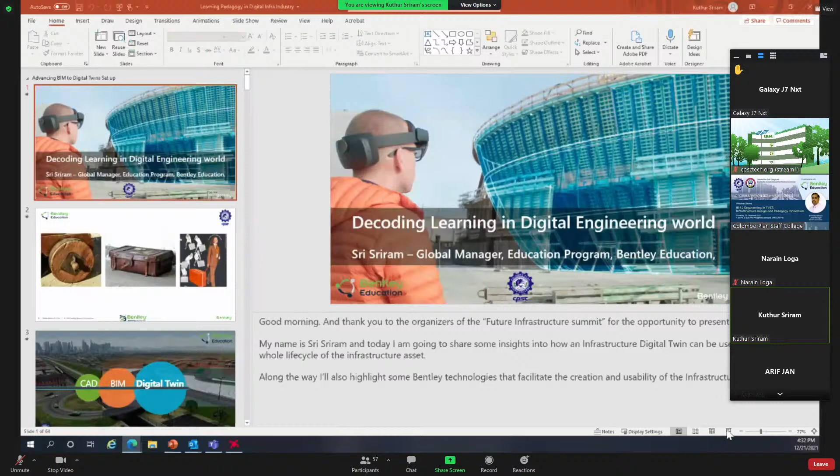Can you all see my screen? Narain? Yes Sri, we can see it clearly. Good, beautiful. Sorry, my camera doesn't seem to be switching on. I don't know, I had more than half a dozen meetings today and the camera was working fine all the time. Now I think my computer doesn't seem to be a good friend of Zoom after all. Anyway, thank you all for your time again.

I can see about 58 people on the line there, appreciate that, and it looks like all across Asia again. So is the presentation in presentation mode, Narain? Yes Sri, not yet, it's not in presentation mode. Okay, now it is. Good, beautiful. Thank you, and the audio is good — very good.

Appreciate that. Okay, I think I'll jump straight into the topic. Thanks to CPSC for giving us this opportunity. This is about decoding learning in the digital engineering world — specifically about career opportunities in the digital infrastructure world. And if we're talking about career opportunities, we're talking about students, so we also need to talk about what teaching opportunities and learning opportunities are available. So this is all about that topic. Let me jump straight into it.

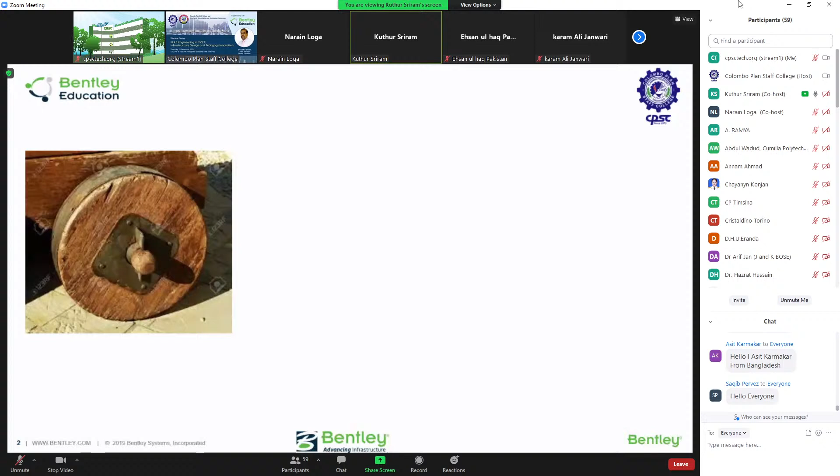The leather suitcase was invented around 1910 to 1917. But the real productivity improvement happened when somebody innovated by putting a wheel onto the leather suitcase, and it became a stroller — an automatic stroller. This brought in real ease, and now I think nobody travels without a stroller today.

So why am I talking about this story now? Because I'm talking about the digitalization of the infrastructure industry. So I'm going to take you through a small story now. There is something called CAD, then BIM, and a digital twin. If you are from the infrastructure industry, you will very much understand what I'm talking about.

Before CAD, possibly in the early 1940s, 1950s, and 1960s, people used to do their designs on a sheet of paper. You remember these large drawing boards, and people had vector scales to work with. So to build a road like this, they had to do at least about 200 to 300 drawings.

Then came the computer-aided designing tool, which tremendously helped everybody by bringing everything onto a computer. So what was the advantage? Papers were gone, multiple drawings could be done in one place, and multiple people could work on the same design. For example, if you're building a house, a bricklayer could be working on the same design, while your air conditioning man and electrical man could also be working on it. So computer-aided designing also brought in mobility, and easier access and storage.

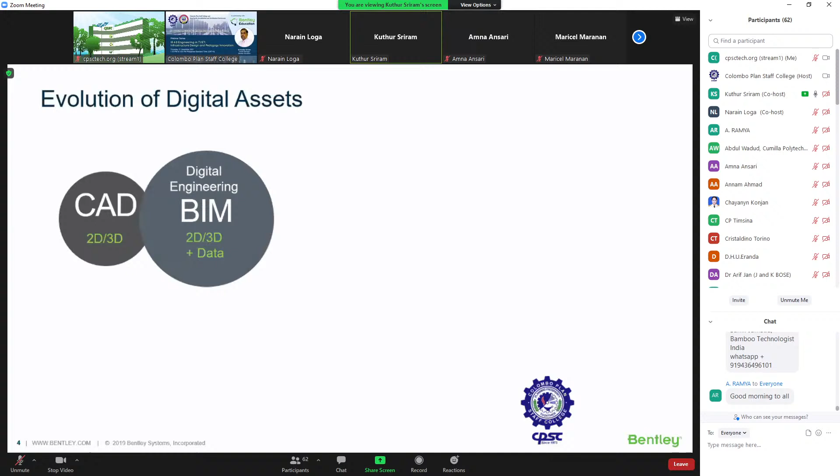So that's where the digital twin came across. What I'm talking about with digital twin is: CAD gave you a 2D, 3D design document. From there, BIM came across, which is called digital engineering - it gave you the 2D, 3D plus the data that was needed. But the biggest revolution was the digital twin. Digital twin very strongly not only gave you the design 2D, 3D, it also gave you live data, so I could do my design using a lot of insight into that.

Imagine if I have live data, if I'm building a road, and I have live recording data about the traffic progress that goes on, I can even simulate 5 years down the line when the traffic increases - how will the road design do, how would it look like? So my design I could do with live data, with a lot of insight, looking forward in time. That's the revolution the digital twin had.

So what is the relevance of this in the industry today? Most organizations today are digitally driven organizations or projects. If you look at the top 10 construction organizations, contractors, or top 10 government organizations which own these projects, they're all completely digitally driven organizations or projects. So if we do not have students who are digitally trained, who understand the digital process in the infrastructure industry, if we don't have a training pedagogy and methodology which are digitally driven, we are losing out in the market.

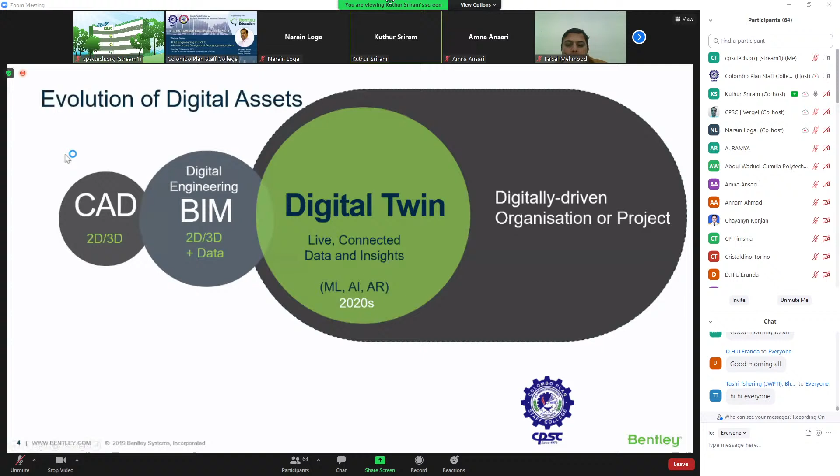The analysis of why it's the lowest is based on two things. One, the infrastructure industry is not completely digitally driven yet. Second, the infrastructure industry also has multiple stages of life cycle. If you look at a car, they build it and then possibly retire it when a new model comes in within 8 or 9 years - so the life of a car is only about 9 or 10 years. But the road you took to come to your office, the road you take to the market, the bridges you cross, the airport you travel from, possibly started even before we were born, and it will go even beyond our time. So the life cycle of the infrastructure industry is too large, and if you are not digitally driven, if you don't have digital data, you lose out. That's why the per capita productivity goes down.

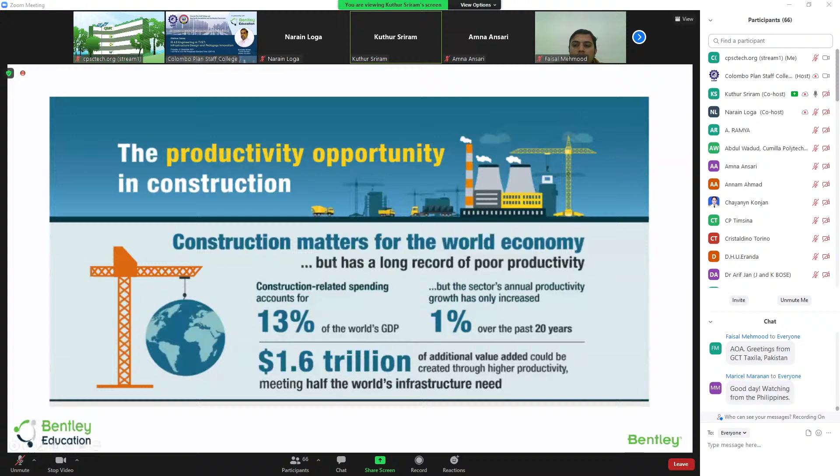Is it not a compelling story why the infrastructure industry should be digitalized and should use digital twins? But I won't stop there. I'll go into the next story as well. Why are the other industries so productive? Why are they so prosperous? I will show you how digital twin is used in other industries.

The reason I'm talking about digital twin and digitalization here is that somewhere down the line in my presentation, I am going to tie it up with digitalization-related learning opportunities and teaching opportunities. What is the learning pedagogy? I'm not going to dive deeper into what could be the learning method, whether it's lecture based, or hands-on based, project based, and what could be the curriculum, because I'd need half a day for that. But this is only a teaser, an introduction to show you, in the digital world, what could be the pedagogy opportunity that could come across. An organization like Bentley can work in partnership with CPSC and your organization to find out how to make this learning easier by creating curriculum, providing tools, and creating project experience.

So that's the idea. Right now I'm on a story about why digital twin is important, how digital twin has made a big difference in other industries, and how digital twin can be taught across. So now, digital twin in other industries - why are they productive? You saw the manufacturing industry; they are one of the top performers in productivity.

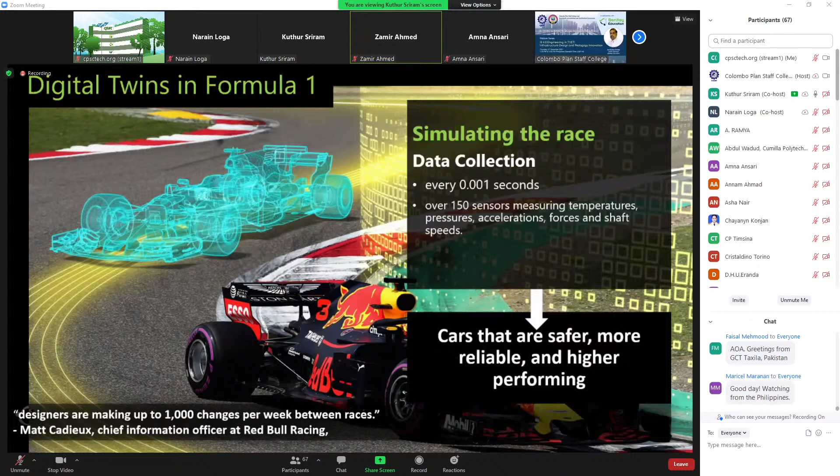This is one industry. I'll go into the next one - this is NASA, the spacecraft.

So that's another industry which extensively uses digital twin. Now going from aerospace to aircraft industry - are you aware that Boeing and Airbus, even before they bend the first sheet metal, create a digital model that shows how the engine works, how the acceleration works, how the heating works on every part. Not only is the designing good, they can also use the digital model to train the pilots and the mechanics who repair the aircraft.

So what is the crux of the story? Every industry is extensively using digital models, digital twins. So let me come to what digital twin is being used for in the construction industry, which is what I'm talking about here. A digital twin could be used very strongly in construction to monitor energy consumption.

Imagine there's a huge airport or stadium, and you want to know which part needs more air conditioning because more people are sitting there, or which part needs more power. A digital model can help you optimize energy consumption, because if some part of the airport or stadium is lesser occupied with people, you can automatically switch off the power there.

Then in the rail industry, imagine the rail tracks run for kilometers. If you want to monitor track wear and tear, you don't have to physically run through the whole track - a digital model can help you. I'll show you a video, a presentation that talks about how it can be done, so wait for my presentation down the line.

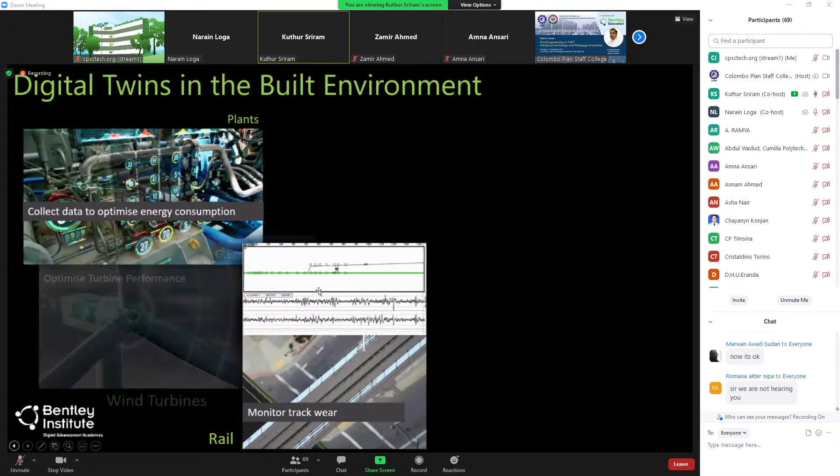And then in the wind turbine industry, you can use a digital model to extensively design a wind turbine. And then for roads, particularly in highly populated Asian places, when you design the road, you can simulate the whole traffic that goes across.

Again, wait for a video - I'll show you a presentation of how traffic simulation could be done, where I would clearly know at 9 o'clock in the morning peak hour what the traffic is, at 12 o'clock what the traffic is. So when I do a design, if the traffic is this much in 2022 or 2021, five years down the line, assuming population growth at a particular percentage, what will the traffic be? Can the road design take it? I don't have to build the road first - I can actually simulate with the available data to design my road accordingly. So in roads, a digital twin really helps you.

And then in any urban city or small town, you need utilities planning for power and water. You can digitally design the underground water pipes and power cables in a digital model, so that you know digitally where the pipelines are and where the electrical power supply is before you dig the earth. So these are certain ways digital twins are used, and in all these places, if you're talking about a road design as a curriculum, you could bring in a tremendous amount of learning pedagogy.

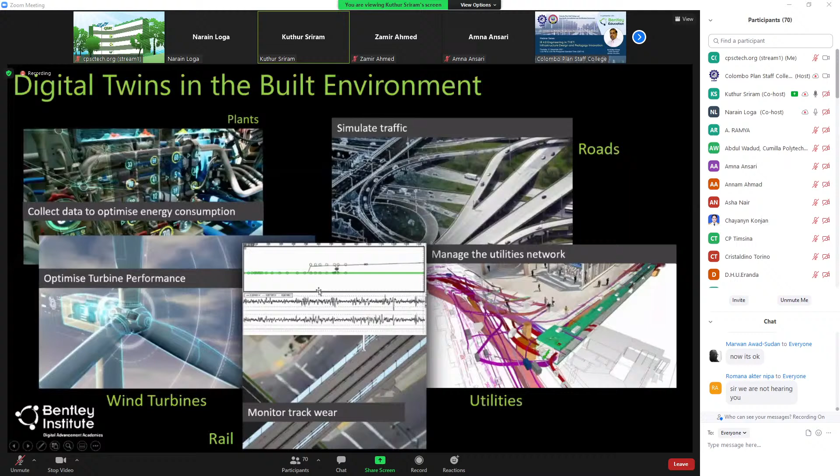So I talk so much about digitalization, let me explain what is the digital twin. Digital twin is nothing but a continuous digital representation of a physical asset. A simple way to explain that is, if you have a mobile phone and you take a picture of yourself and look at the picture, that's a digital twin of you. You are the physical one because you are living in blood and skin, but the digital picture available is a digital twin of yours, because it could be sent across as proof of identity. You don't have to go there. So that's exactly what a digital twin is.

But the only difference between that photo and an actual digital twin is that a digital twin is a continuous representation. If you take a picture now, 5 years later, that picture is not a digital twin of yours, because in 5 years you would have had changes in your hairstyle, changes in your skin color, changes in whatever. So 5 years has an effect on every human body. A digital twin is a digital representation of a physical asset, but it's a continuous one.

So that means data has to be really connected. If I relate it to a building, say you have a digital model of your house, and data keeps coming in every year. If your outer wall color is fading, and the picture exactly captures that color fading of the outer wall, you exactly know what your digital model is showing about the house. You can make a decision about when to paint it, what to do. So that's exactly what the digital twin is all about.

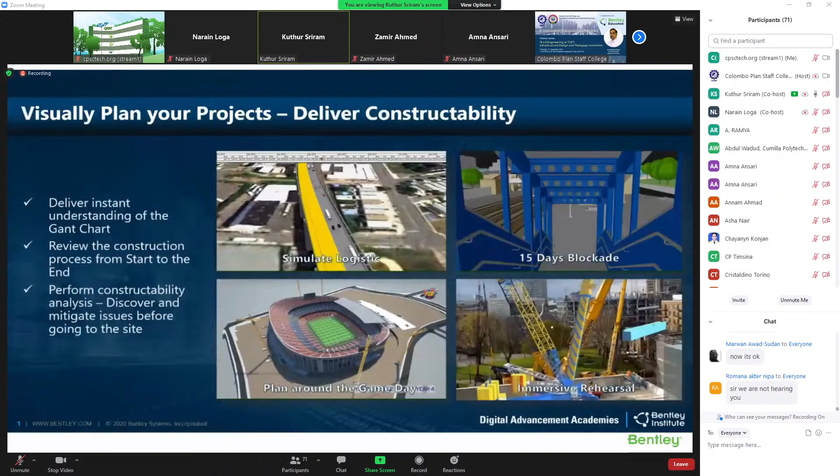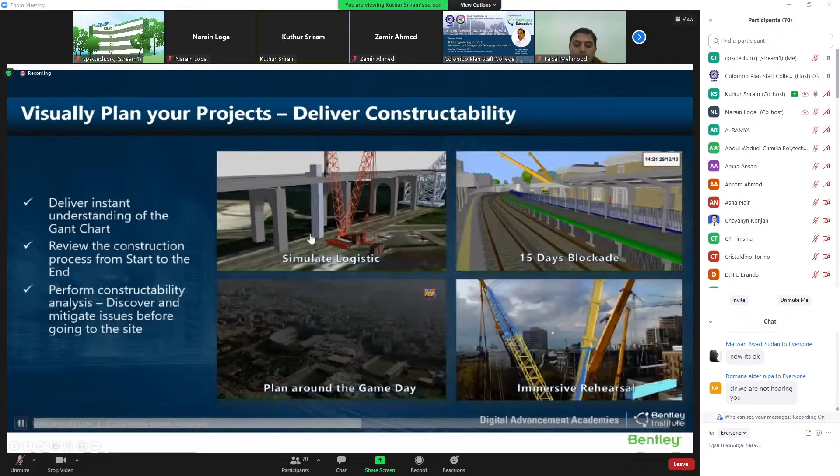See, imagine this. I will also connect it to the pedagogy here. This is simulating the logistics of a bridge being built across. If your student can actually use a digital model to find out when do I need a crane, when do I need a crane operator, and when do I need a truck driver to bring those components. Plus, when the crane is operating, what are the areas I have to cover up for safety? And then as a training manager, you could show the set of engineers how it is. So this could be a part of learning as a pedagogy, right?

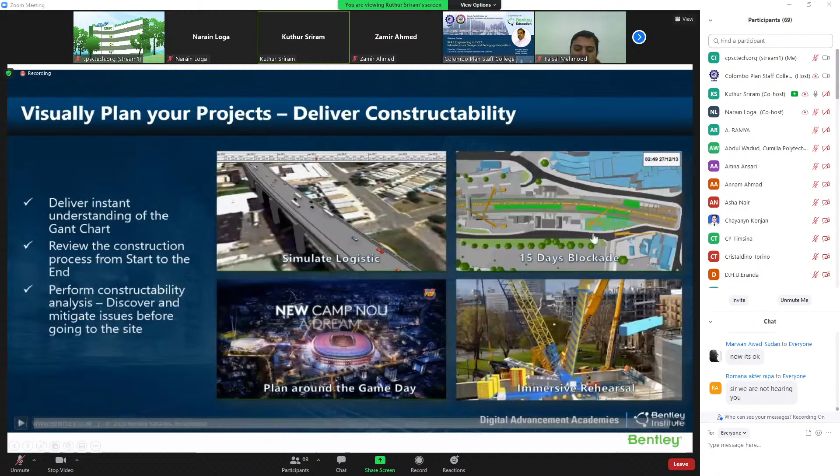And this is a planning example. Suppose a construction planning engineer or supervisor can actually use a digital model to do planning when there's a game that is coming on, so when do I build a bridge. And then this is what I talked about, immersive - where a person can exactly know without sitting onto the lift, operating a crane, and digitally get training on how to move. So this digital model is a very, very immersive learning tool that is valuable.

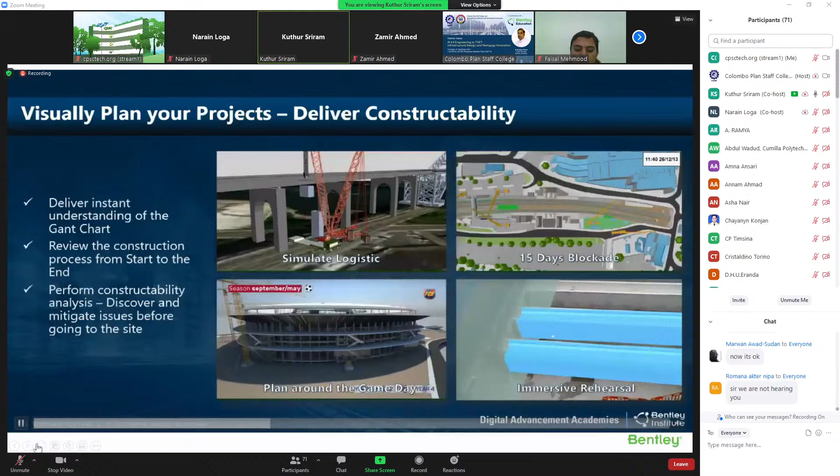So that's just a quick example I showed you. Let me now jump into this actual live digital twin of a building in Singapore, Fraser Tower - this is actually a building of Microsoft, or the Microsoft Office. How a digital twin helps you do an energy consumption pattern - I'll see on floors 9, 10, 11, 12, 13. I've taken one of the floors and because of the digital model I was able to do a cross section, find what is the power consumption, find out what is the level of occupation. So this is exactly a digital representation of a building in the same geo position, showing exactly what the next buildings are that are available there. So this is a digital twin model.

So I hope you can all hear me. So how does a digital twin work? I will show you a rail track that is put together, how a digital twin can add much more context to it. Here we go.

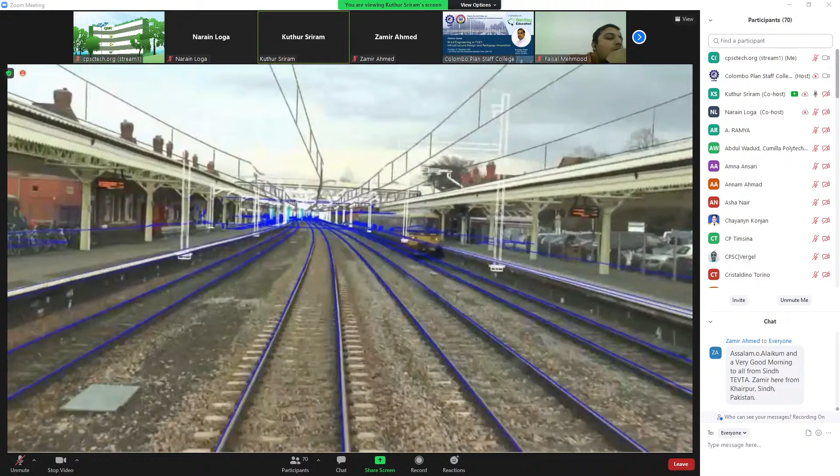Yep, it's coming on now. See, this is actually a rail track - overhead traction data is taken across and overhead traction coming on. Onto this, we immerse the actual location physically. You exactly see the video of how the station is, how the overhead bridge is. This is actually a digital twin with context of where the location is, what time it is.

So if a learning pedagogy for infrastructure students could be brought across using this kind of digital model, you could be an electrical engineer, you could be a civil engineer, you could be a mechanical engineer. That's one of the reasons why I brought this across.

So the other digital model I'm going to show you is a construction progress where if you see the video that is going to come across, you will see the scale moving there. This is the construction progress of an existing building. I will move to it now. See, this is actually a building. Look at the bottom of the screen - June, July, August. It keeps moving across to September.

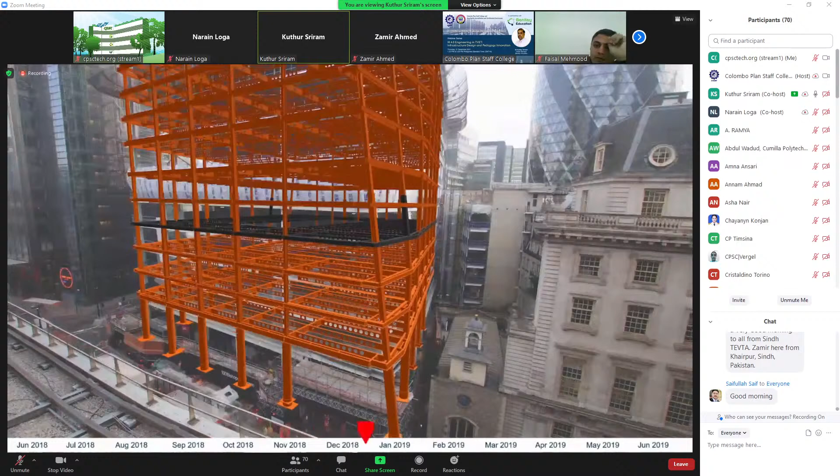So the digital model can help you to move forward. If you're in September 2018 and you want to see February 2019, how will my building look and what are the things that I need for the building to go across. A digital model construction program gives you exactly that picture.

Actually, a good digital twin is like a time machine where you can move forward in time, you can move backward in time. If people have visited London, this is actually a building that came up in London in real time. The digital model is an exact representation of what the building is with all the neighboring buildings.

So using this construction model, when there is a crane that is working here, I need to block the road for traffic - I can even plan the traffic plan. Imagine all of this could be brought into a curriculum as a learning methodology, which Bentley has done with more than 20 to 25 universities across 20 to 25 TVET courses across Australia, New Zealand, and Asia. That is what we are trying to expose to you now.

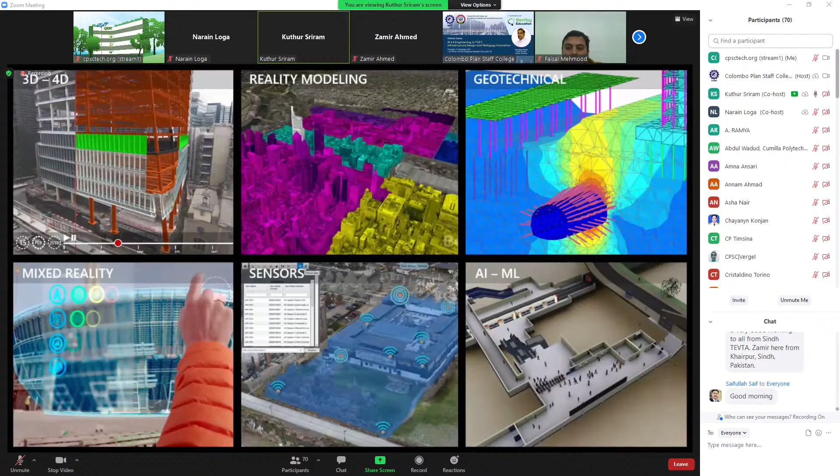So we talked about how a digital twin is useful to you and what are the benefits of that. Now I will jump straight into the next process of what are the different life stages and how a digital twin can help you out. This is where we are going to dive deeper into the learning pedagogy.

If you look at a construction, there are 5 stages in the life cycle of the construction infrastructure industry. To relate it to you, let me relate it to a building. If you ever built a house, you first get into a plan stage of where do I build a house, what is the cost, when do I start it, what is the land that is available, how do I clear the land, who is going to be the bricklayer, who is going to do the concrete - that's the planning stage.

And then from the planning stage - I talked about a house as a small project, but imagine if you're building an airport, a whole metro rail or a huge rail - the amount of planning that is needed because of the size of the project. That's the first stage. The moment planning is done, you know which land it is, how do we do it, what's the cost, who the contractor is - all that planning is done.

Then the design stage comes across, where a digital design of the whole project - let's say in the house, you build it and then do certain analysis saying that when it rains very heavily, can the soil underneath take it across? That's the analysis stage. From a design you do an analysis to find out whether that building can stand in the soil, can it stand the weather, and what happens if there is, imagine, a rail track.

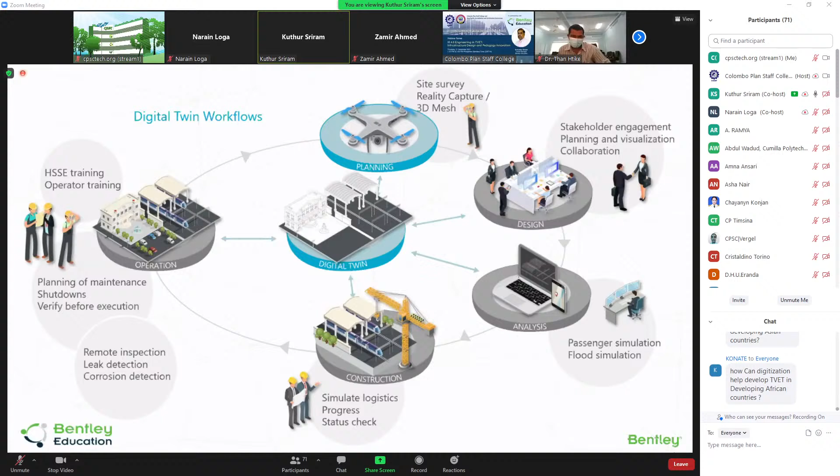Good, thank you. So now let me take one by one and show you certain digital applications, and then we'll jump into the pedagogy. I'm taking right now the planning part of it. So when you get into the planning part, let's see.

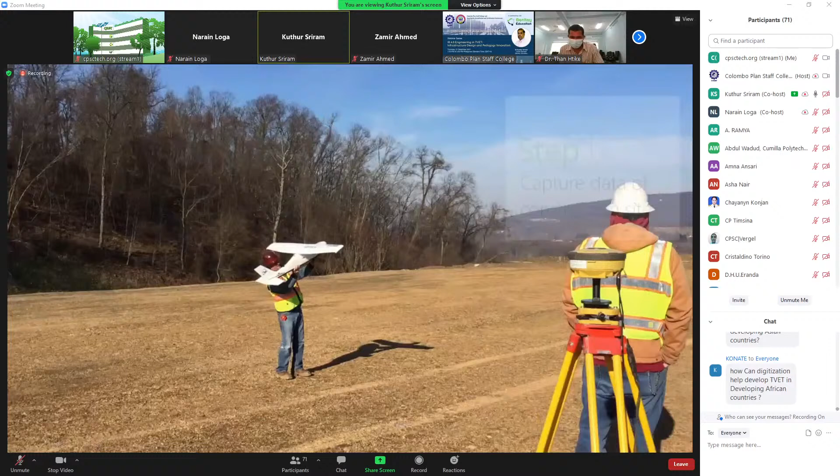I talked about site survey - imagine, look at the video. I'll come back to you or talk to you. This is a survey of a huge piece of land. He flies a drone, captures the data, and then the data is put into a digital model, and this is actually a digital twin of the whole land there.

In that, you can even digitally find out where the bridge will come in, what the structure of the bridge is, and this is actually a digital model of land available for a mining industry. Look at the size of the land, and you could use the data to find out where the land is high - this is a measure of that.

Your students could be trained to use this tool - how do I see the land is up and down, how do I fill it, where do I cut it.

Imagine in earlier days - and I'll possibly read on it so you can relate to that - people used to walk around the whole land with a tape in their hand. With the digital technology that has come in, we don't do that at all anymore. We only fly the drone, capture the picture, and then go to your desk. You're not even at the site, and this guy is sitting in his office desk working.

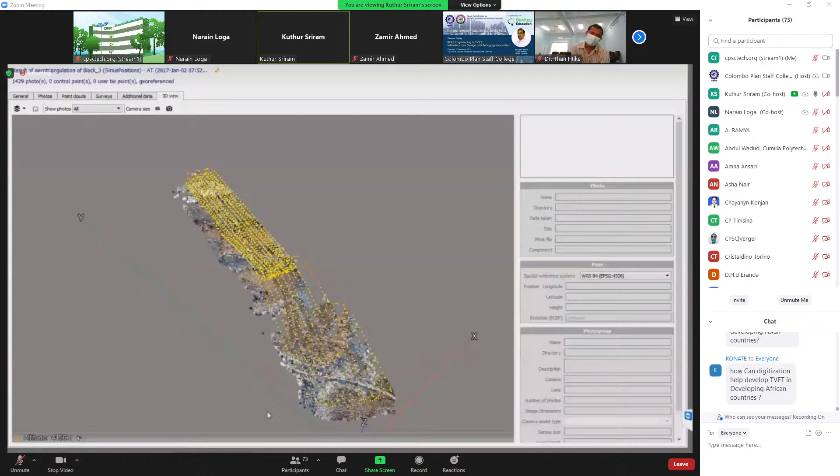How do I train a student, how do I train a future professional to use this kind of technology to improve the industry - this is going to be a skill that comes across to measure such a large area, which used to take weeks and months to get results using a traditional method.

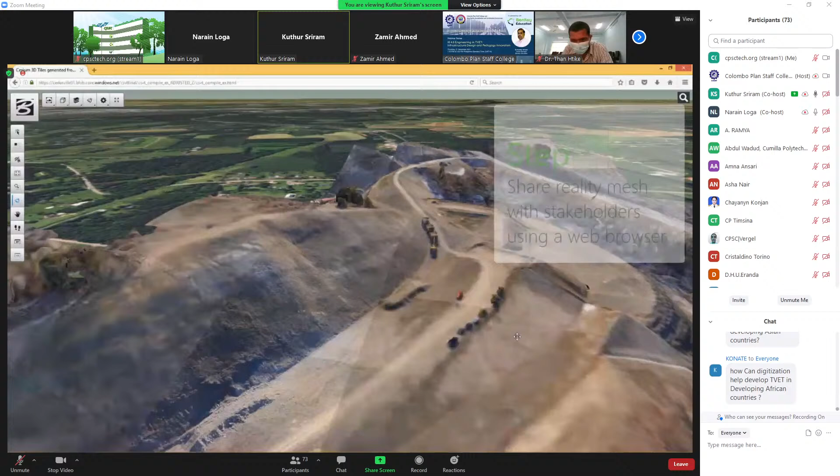This is like digital surveying across - there are multiple technologies that are used. We could create a learning pedagogy for all of this kind of learning.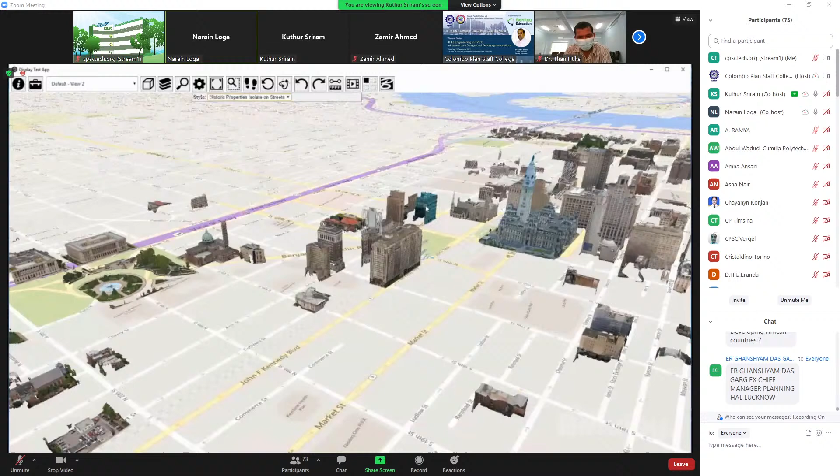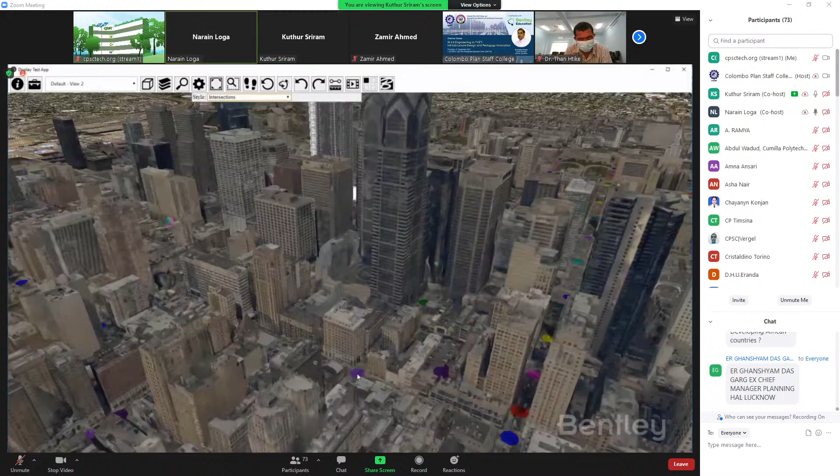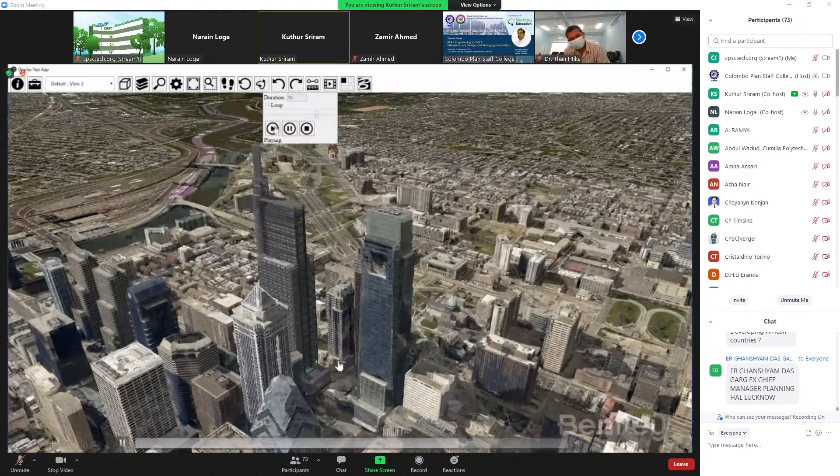Sri, I think the audio issue is related to the model. The video is affecting your audio. When you start playing the video, your audio gets distorted. Can you hear me? It's not my bandwidth because I'm working from the office on Wi-Fi, I think it's in Zoom. Okay, I'll try to reduce my talking and let the video go. Can you hear me now? Yes, we can hear you.

That's the planning part where I talked about planning a completely greenfield site, where there's no building at all, versus planning of an existing huge city, and how surveying using a digital tool and pedagogy could be used across both. I wanted to re-emphasize the learning opportunities available, and the tremendous amount of learning content in video and hands-on form available from Bentley Education, used by multiple universities, which we want to bring down to VET level. Now I'll move to the design process and how digitalization can help.

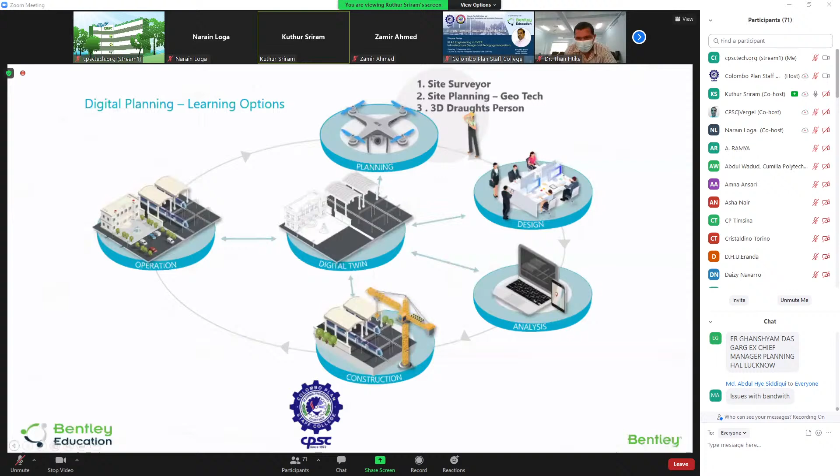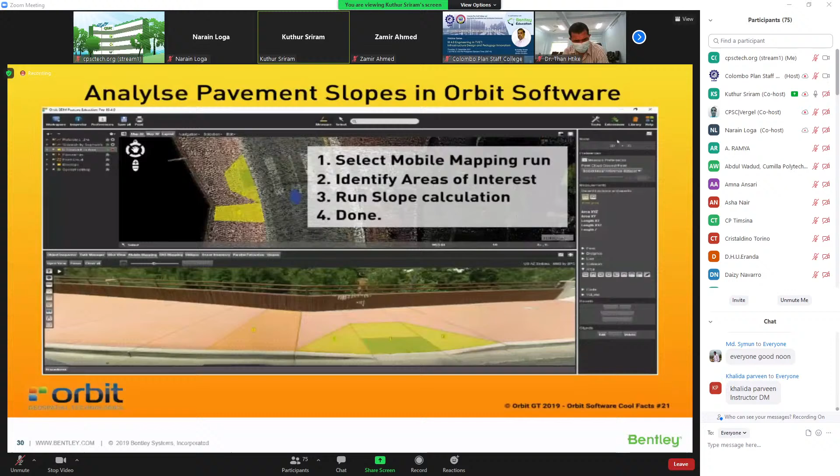I'll stop talking when the video runs since there's a lag. This video is about designing road pavement where you need a specific amount of inclination for wheelchair access. This design isn't done by people going to the pavement with a tape measure - this is a digital model. Notice a digital map is used to measure accurately whether the slope is ready and can be designed. This is done sitting in the office, using a tool called Orbit, which does an analysis to tell you whether the slope is perfect and approved.

What you saw in this digital model is someone designing a slope in a pavement at the design stage. The upper part of the picture is the digital model taken using Orbit, a Bentley design tool for roads and pavements. He takes a drone picture of the platform, loads it into Orbit, and sits in the office designing the slope needed across a 20 or 30 kilometer pavement - imagine 200 slopes, it would take a lot of time for people to measure manually. This is creating a digital twin to boost productivity. The tool can analyze the designed slope and tell you if it's ADA compliant, so wheelchairs can go across. So that's one design.

The next slide is about bridge design. In my part of the world, in Melbourne where I live, there were more than 14 accidents last year of trucks trying to go under a bridge where the clearance wasn't good enough, damaging the bridge. How you can design around this using a digital bridge model without going there physically is shown in the next video - have a look. That's a digital video picture, and he's measuring the road underneath the bridge, the area which he has to measure.

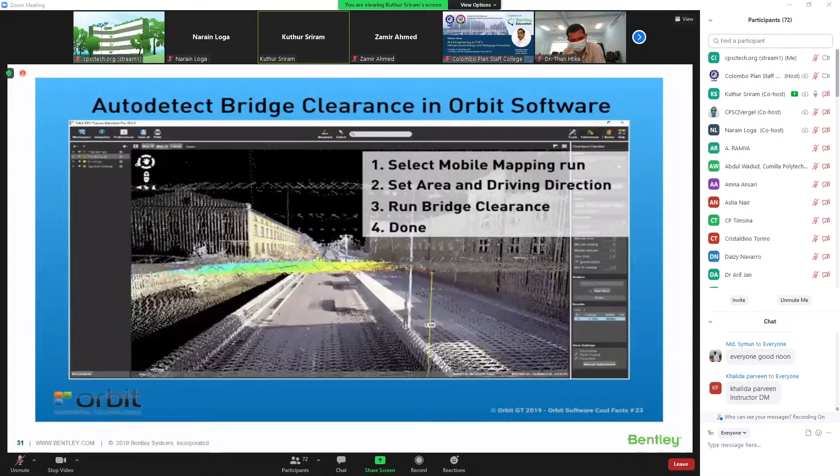And then now he's measuring the height of that, finding out whether the clearance is good. Otherwise, he will possibly make a slope onto the road. So this is actually a digital model, a digital design of a road under the bridge so that the clearance is put across.

There are two ways to look at it. Either he knows exactly what the clearance is so that he can put a notification much ahead of the road saying trucks beyond this height do not travel, or he can go back and redesign the road and create a slope there. It's all about digitalization, digital model, and this data will be permanently stored.

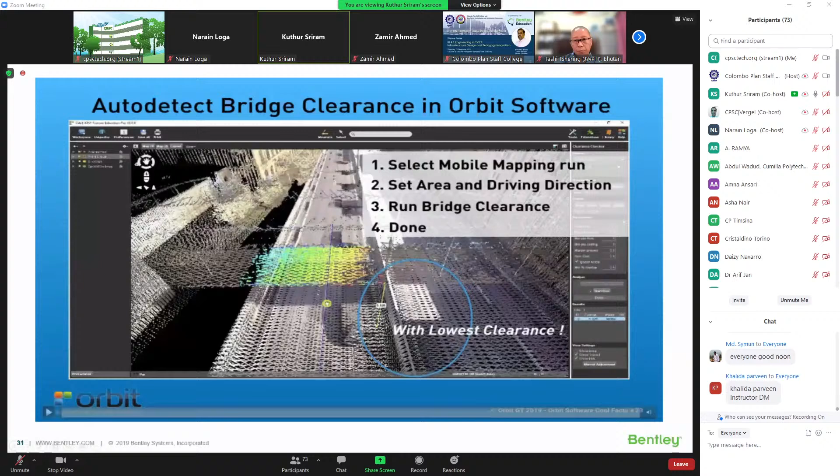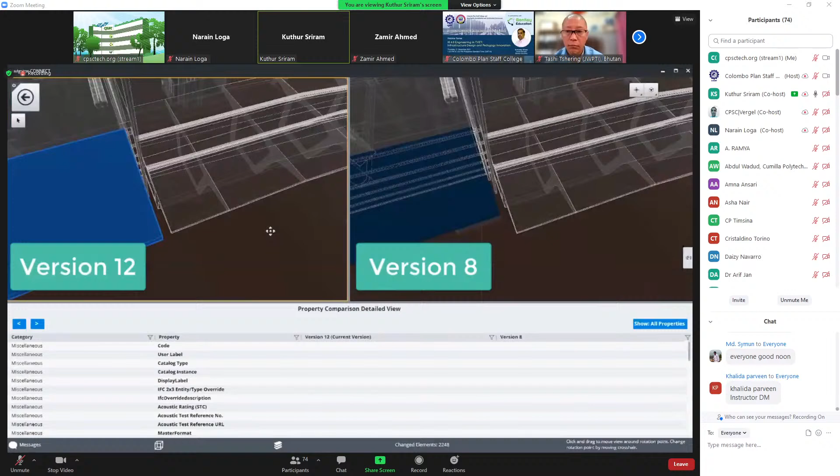But I think a more interesting video is that you can even do a heat map using a digital model of that build to find out at peak hour, when there are more people there, what kind of heat is generated. And then, because of the changes, can there be more air ventilation coming across? So that design could be done across, which again is a digital model.

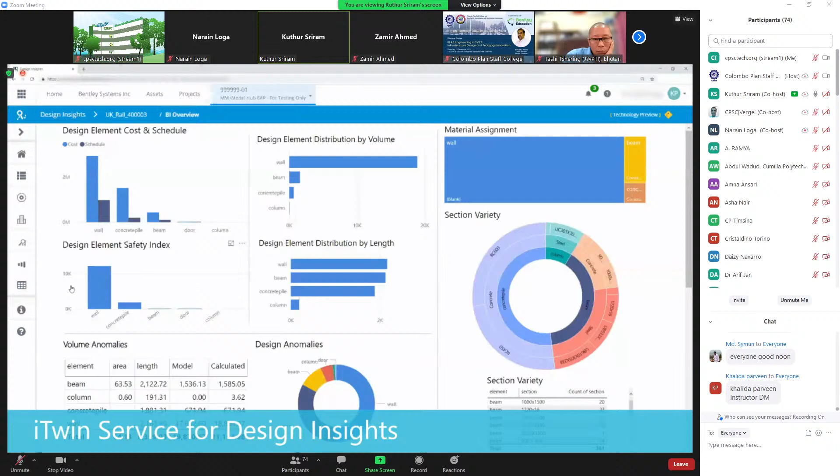I'm going back again to connect it to pedagogy. All these skills can be incorporated into your VET students as a process of learning so that when the industry looks for this kind of skilled people tomorrow, they are ready and available, right? I think I will go to the next one rather than diving deeper into this. I'm conscious of time. So from the design stage, these are the architects we talked about. These are the career opportunities and these are the learning pedagogy that could be available.

Let's go into analysis one, which is an interesting one where I talked about traffic analysis. So I'm going to go into the analysis part of it. Now I'm going to show you this is the station. Have a look at this video.

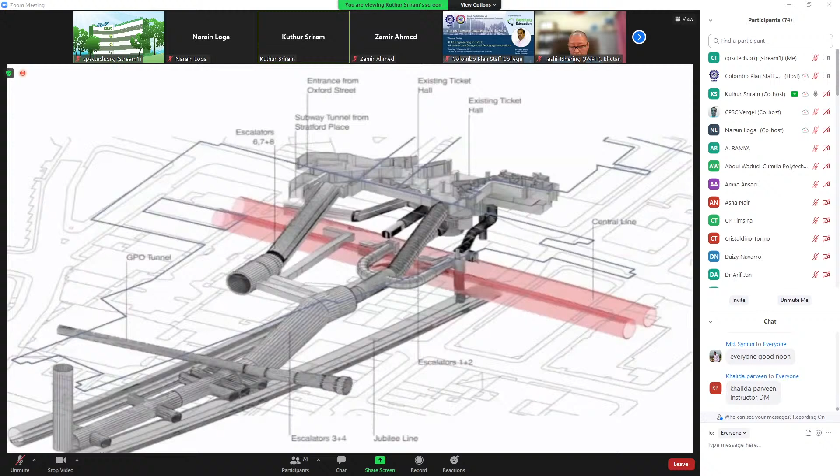This data is collected from the camera on top, the CCTV camera, and then put across how many people are coming in. You can actually do a complete simulation of pedestrian traffic to find out if there is better planning, this kind of clogging of people may not happen. So digitally you could plan that, and I'll show you how a digitally planned station's pedestrian traffic works.

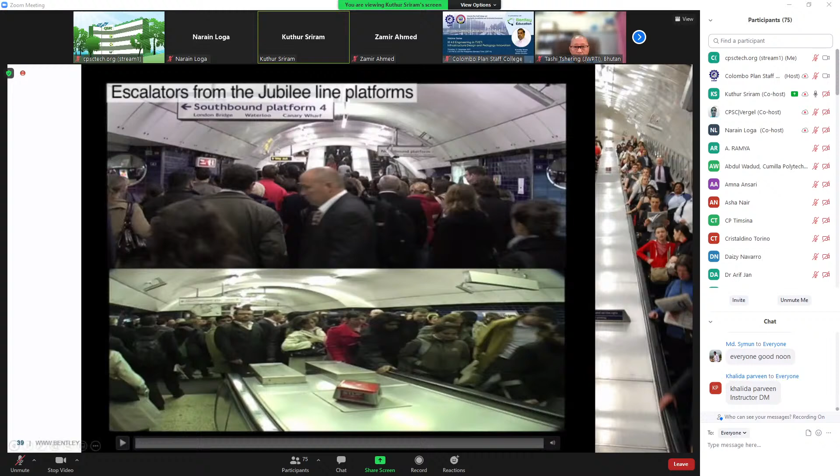Have a look at this now. You will get to see that now. Sorry, sorry, I'll go back one. I skipped a slide. Yep.

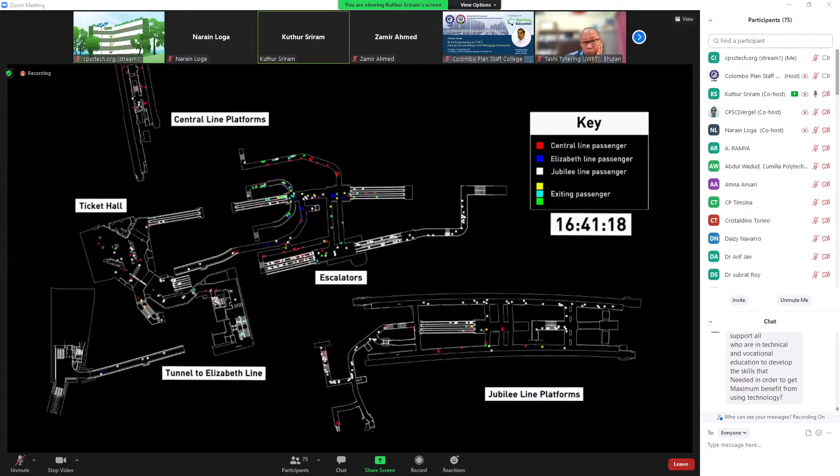This is now multiple stations, and then the boom gates - how you can at every hour, at 4 o'clock, see what is the level of traffic that goes on. Imagine those gates that are open there - is there traffic that is working on there? How is the... so this is typically doing an analysis of an existing design to find out whether it will hold the current number of pedestrians coming in.

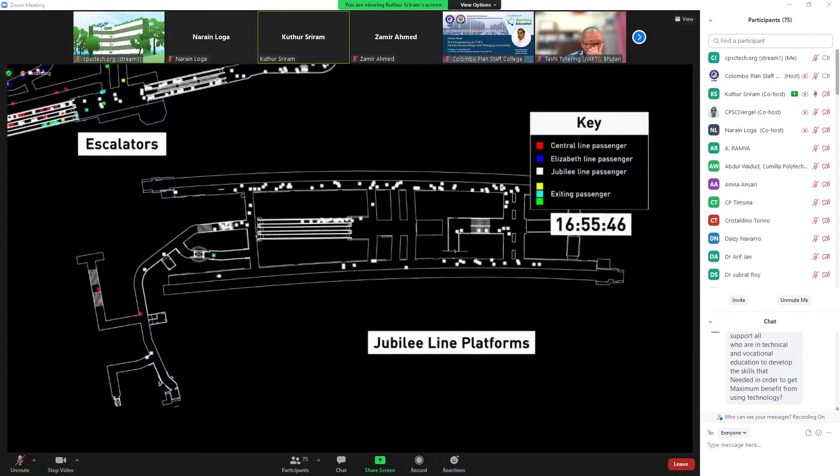And then you can even do a simulation for, say, 5 years from now with an increase - if there is going to be a 5% increase in the number of people traveling, or in 5 years 20% more, will the train still work and then people are dropped off? That's what is shown there. Can it do it? This is a skill by itself.

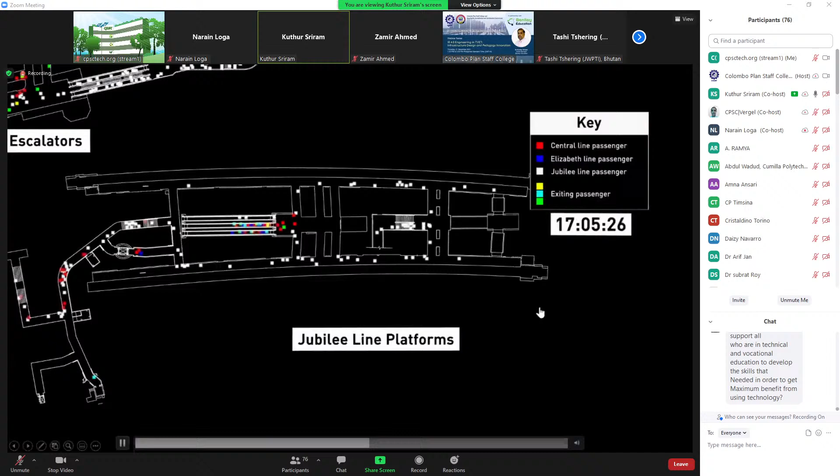An analysis skill - there are tools that are available, solutions that are available in Bentley that could be part of a learning curriculum for your VET students to do traffic planning analysis. So not just traffic planning alone, pedestrian planning.

Here, the next one, if you look at it - this is a stadium after the game. How long does it take for people to clear the stadium? The number of exits, if you count it - so if I increase the number of exits, will it work? Or assuming there are only half the population, can I close the exits so that I can save power?

And then imagine if there is an emergency and people have to evacuate it quickly. How can I do it? This is actually an actual digital model of Barcelona Stadium in Spain, on which the digital simulation is done.

Imagine if you could teach this to your students easily because learning content is available. So this is about the analysis part of it. What are the multiple analysis learning pedagogies available? I only checked on transport modeling, but there's simulation engineering and a lot more that could be done, in the form of soil analysis, structure of a building, power consumption. I don't want to go into every one of it because it could be time consuming for you. So that's the analysis part.

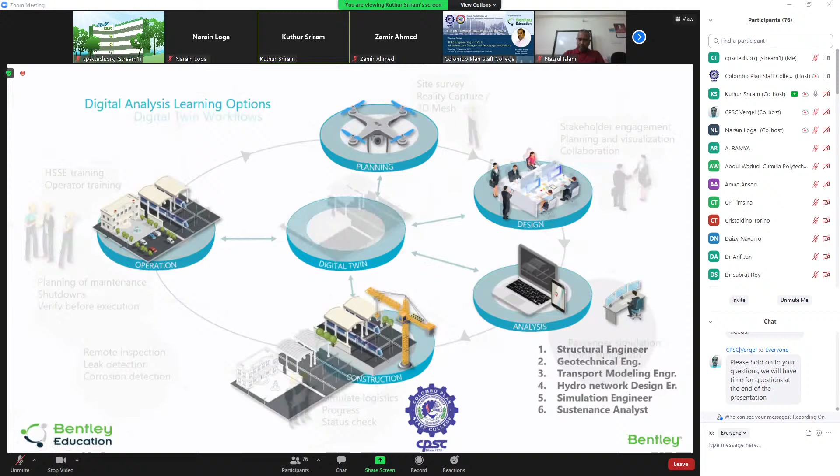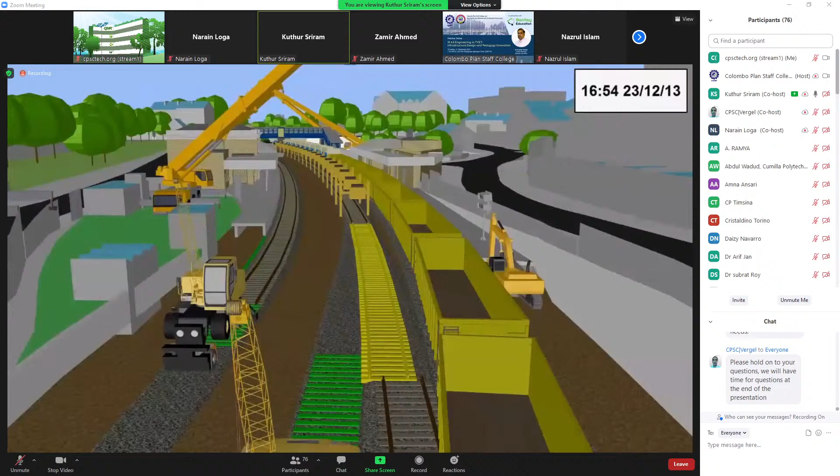Let me go into the construction part now. This is actually a digital model of a construction that is done. Let the video run on. Look at the calendar on the top. So on each day, every hour, what is the equipment that is needed, and what is the safety measure that has to be done. So this is a rehearsal for construction digitally done, so that people in the planning process can work together to find out what kind of equipment I need, where does it come from, what kind of maintenance I have to do, what kind of management I need. This kind of knowledge available in construction is extensively used to prepare a report.

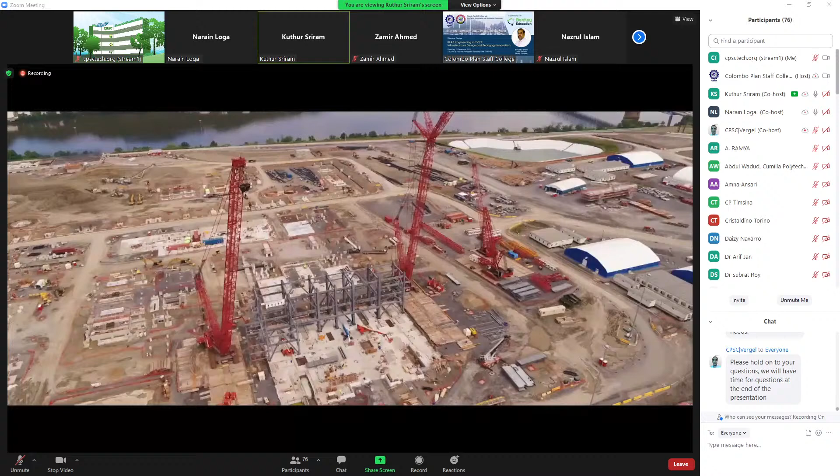Excuse me, Sri, we can't hear you. I think your working voice is well, this is distorted, supposed to work again due to video and audio at the same time. So I think you need to let the video play first, then give an explanation. Can you hear the audio? Narain, I know you wouldn't hear the audio, right? Did you hear the audio? No. Did you? No, no. Okay, I'll skip that. Don't worry.

So from the construction stage, the most important part of it. In the infrastructure industry, the planning, design, analysis, and construction -- if you spend $100 on a whole project, planning, design, analysis, construction only takes about $30. The remaining $70 goes into operation because, as I told you, the life cycle of infrastructure is so long. It could possibly build a whole railway station. Planning, design, and analysis would take about, depending on countries, 4 or 5 years, say 7 years. But then the railway will operate for at least 70 years. That's where the tremendous amount of money is spent. And that is where every organization is looking for digitally enabled, digitally skilled resources to work on.

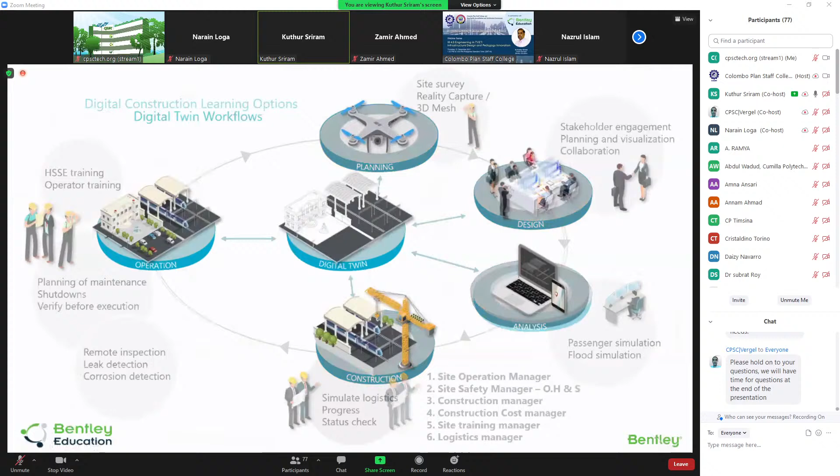What are the various digital learning pedagogies and learning opportunities that exist on the construction side? This is what we talked about. I will take you through one by one.

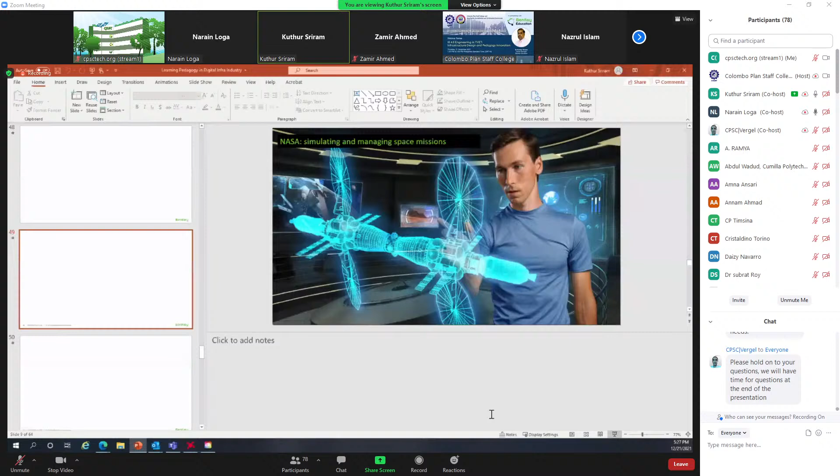So this is a great video, but the audio is not working. I will stop and try to get the audio. Okay, Sri. So every time there's audio while you're speaking, and then when you play the video, it just gets distorted. I'm trying to enable the audio. I'm trying to get the audio on. Yeah, now it should come on. Hopefully. And if you can just let the entire video play first, because when you speak in between, the whole thing gets distorted.

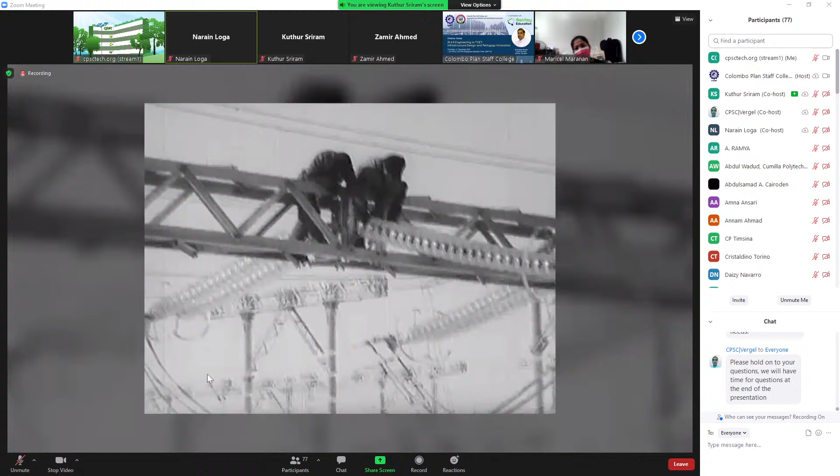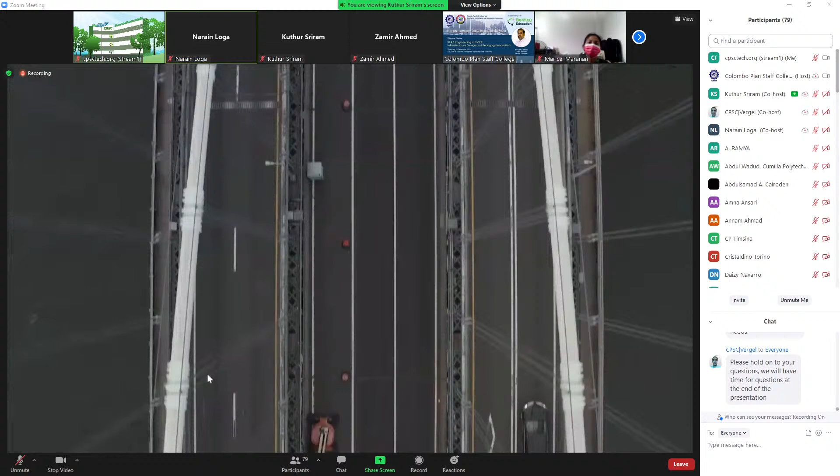I was reading through a magazine and saw a picture that was kind of grainy, black and white, and showed several men, bridge inspectors, on ropes hung over the side of a structure. That picture had been taken in 2013. It looked like it was from the 1960s. We've got to be able to do better. There are currently over 20,000 bridges in the state of Minnesota. It's important to keep on with the inspections so that we can properly maintain them over the course of their life and find out when the need is to replace them. We started partnering with Bentley because both of us really wanted to use technology to improve the inspection workflow. Most of those engineers don't go out in the field much, so it's hard to relay through close-up pictures and explain what I'm seeing. We came to look at how HoloLens could get understanding of what's actually happening in the field without having to be there.

The HoloLens and Azure Remote Rendering was a really unique way to bring the bridge into the office to do the inspection. Our company has been very involved in the idea of digital twins, of having computer models that replicate what's physically there in the field.

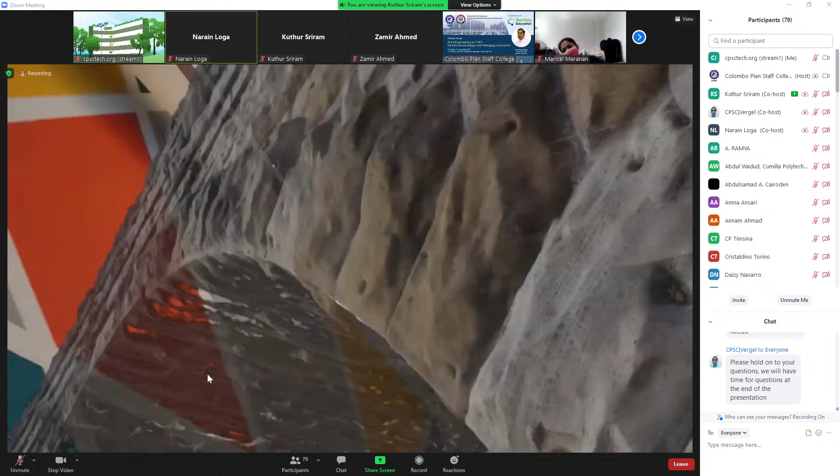Images get right down to the cracks themselves. We can measure it, not just that detailed. We have all this information at our fingertips that we never had before. If we could reduce the overall expense by 10%, that could be a humongous win. Now we're talking several times that in overall savings.

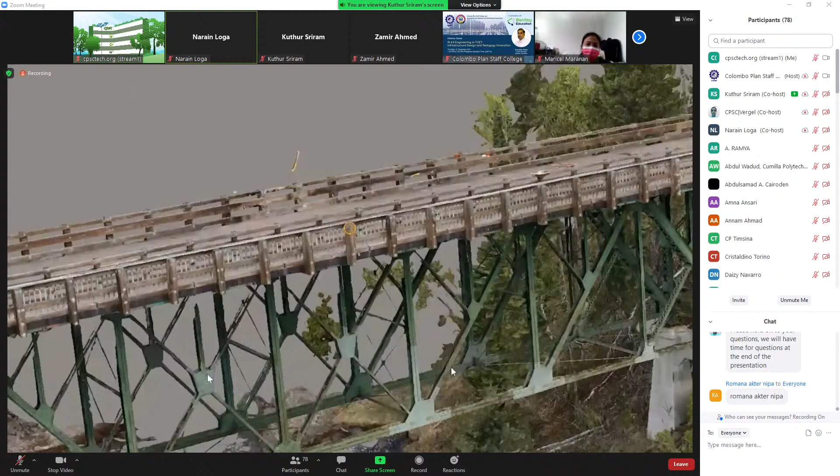Sri, I think you're on mute, Sri. Are you there, Sri? Yeah, I'm coming, Narain. Yep. Okay, can you hear me now? Yes. Narain, can you hear me? Yep, I believe you can. Yes, yes, yes. If I share the audio, I share the audio of the video, I get muted.

I don't know why. Okay, anyway, so what you all saw there is inspection of a bridge process. Give me a minute. What you saw there is inspection of a bridge, and the traditional way is people using harness and ropes to hang on the bridge and find out where there is a crack and where there is rusting. Imagine the safety action plan for a bridge like this, how many people are needed to work on that, and multiply that into the number of bridges in a road, in a state. So today the digital technology, you saw them taking the whole digital model of the bridge to their office, where they could actually put that digital model onto the working table of the office and then look at it and find out where the cracks are. So this by itself is a whole technology of asset inspection.

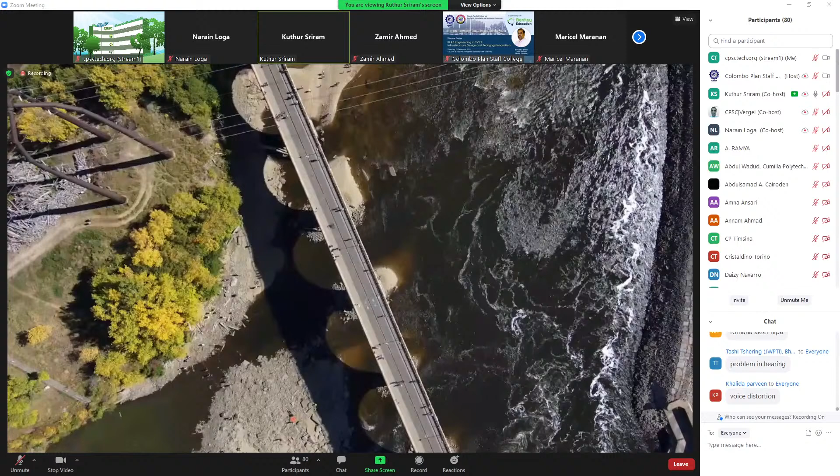Yeah, this is again an inspection of a road. If you watch the video, there are places on the road where there is caving, what we call rutting. People are not going to those roads to inspect it. They are capturing a picture of that and then identifying where it is, what it is, exactly what location it is, even using your geo map, Google Map or equivalent, to tell you exactly where that rutting is, so that the repairman goes exactly to that location rather than digging for 100 meters around. So I'll show you that when the video runs on, so that you get to understand. Ready for it now.

This is the road he is measuring to find out the rutting. He runs it using our digital software and finds out where the rutting is, at the bottom of the map. So to maintain the road, particularly the pavement, you can clearly identify and plan according to the level of damage that's done, and they repair it.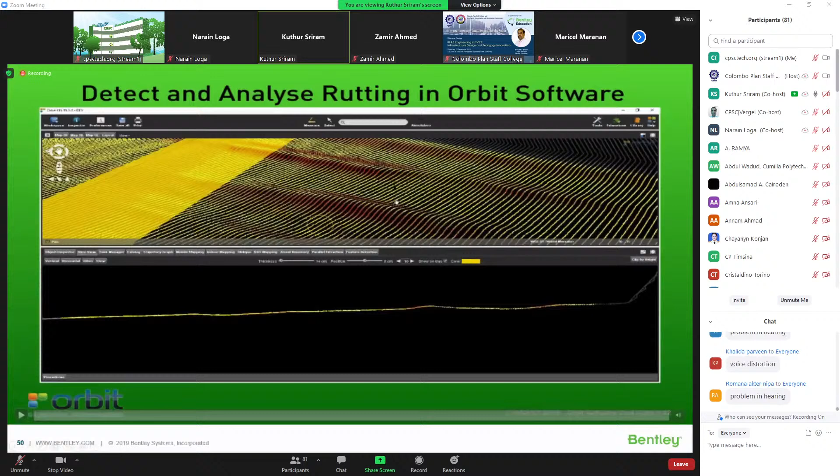The next one is another interesting one. Every country has tremendous numbers of towers, signaling towers, and people have to climb up to find where the problem is. Imagine if I can use a digital model with a drone, take a picture of it to find out where the rusting is.

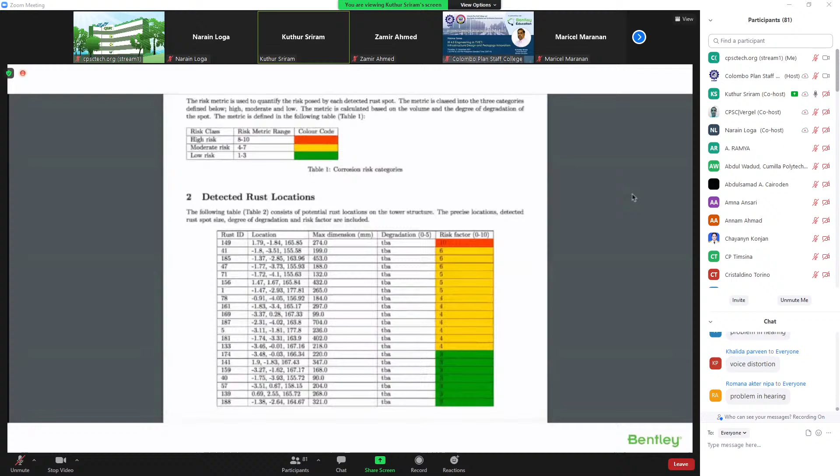This is a little about machine learning, but I just want to give you an introduction of that. It clearly tells you with a digital model where the rusting is and what it is, so you can plan exactly what you need to take there to repair it or move it across.

I can use the digital model to find out where there is deterioration of the metal. I can use the same digital model to find out what is the weight bearing it. Can I add one more antenna? Will it bear the load? I can use the same digital model for wind analysis, to see if there's going to be a storm, can it withstand it, and how do I make it stronger?

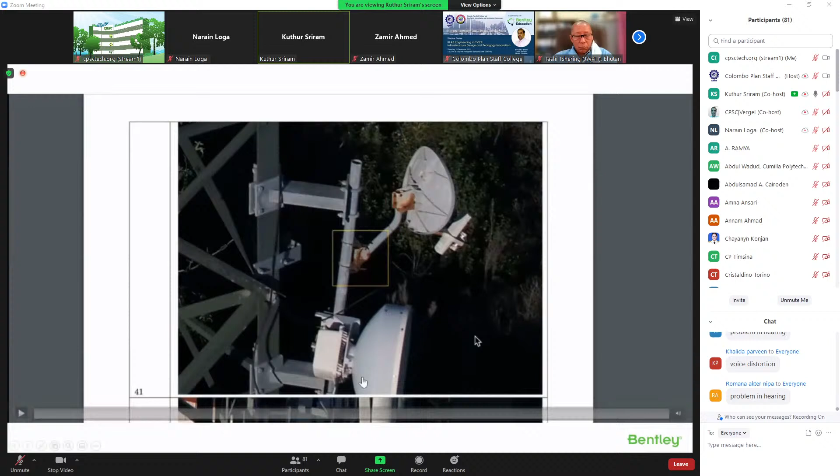So multiple options could be done, and with the simple operation of looking at it and the maintenance of this, people don't have to climb it anymore. Use the technology of flying a drone, take a picture, and identify where the rusting is. This could also be taught and skilled to students. Imagine from your institution, if people are skilled on this and coming out, how popular and successful your institution would be.

Going into the next one, if you look at the bottom of the screen, on 2019 the level of rusting compared to 2018 is what you can see. The level of rust growth between '18 and '19, you can clearly see that. Nobody climbed onto this, and this is one more way of doing operation control or maintenance of an existing asset.

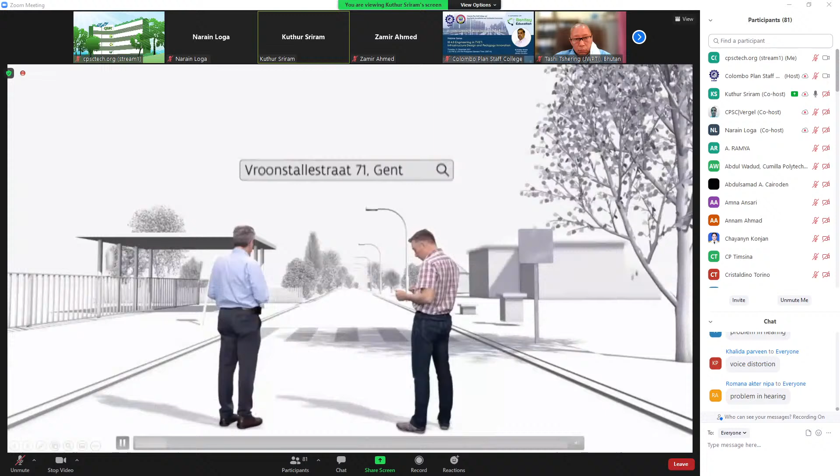So I'm going to the next one. This is a record. Stop it. Give me a minute. I will go again, and because it's an important video, I'll do this. Because of the technology, I don't know the Zoom. I'm going to share the audio so you understand, and then I'll explain it to you again.

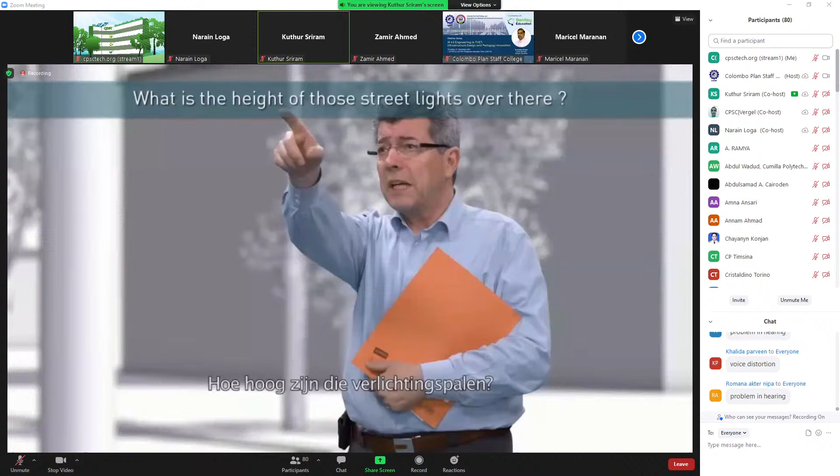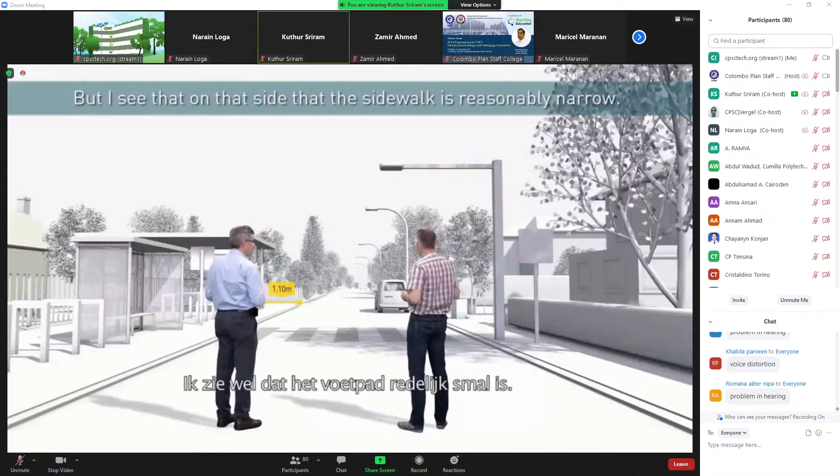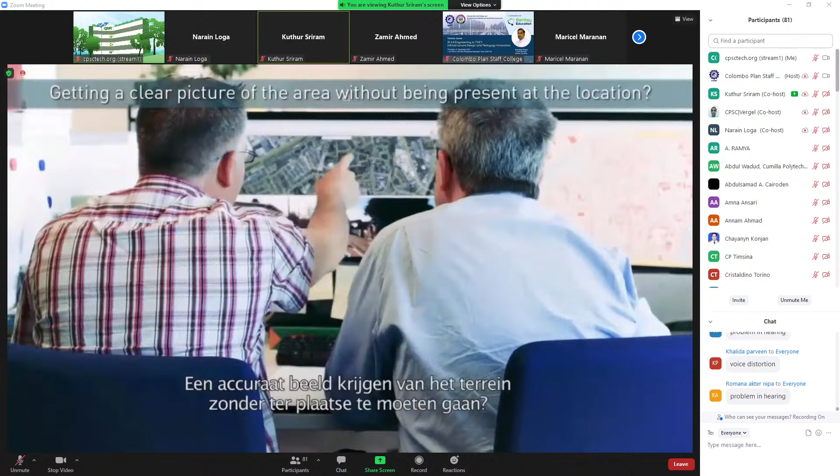Tom, a bus shelter must be built at Vroonstallestraat 71 in Gent. Let me check it out. Yes indeed, that's correct, a bus shelter on the side right before the zebra crossing. Are there any possible obstacles we have to keep in mind at this location, for example to let a tow truck pass? And what's the height of the street lights there? That is going to be okay, the tow truck will be able to pass underneath properly. But on that side, the sidewalk is reasonably narrow. There's also a parking lane, but I'm afraid we still have to take a small piece of the road. Let me check the width of the road over there. Just as we thought, I think we need to provide a temporary detour. Traffic is much during rush hour. What about traffic flow on surrounding streets here? I think if we redirect the traffic, we can avoid a lot of traffic jams. Getting a clear picture of the area without being present at the location is possible thanks to the 360 degree image database for the Flanders region.

Yep, I've kind of got an idea of how this works. I'll share again, share the screen now.

That was actually a video of someone sitting in the office trying to plan a bus shelter and all the different ways he could use the digital model. What are the different ways he could use the digital model to plan it? Believe it, they were sitting in their office and working, and they were able to find out whether those street lights were there, or where a construction truck can come in. They measured whether the bus shelter is going to stop the traffic, and were able to work on finding out that it's going to stop the traffic.

So then, if I have to block the traffic there because the bus shelter I'm building is going to protrude into the road, I can even plan what detour is needed and stop the traffic accordingly. All of this could be done as a planner using digital technology, using Bentley technology altogether. So I'll go to the next slide.

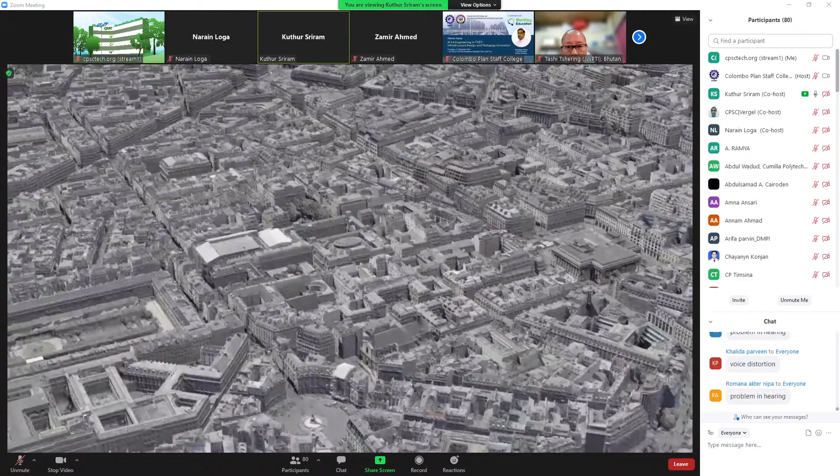This is actually a flood modeling of Paris city, where you could plan how the city will look when there's a flooding. This is the actual digital model of the city, and every building is exactly how it is. This is the normal rainfall, and the water goes across there.

And if there is an increased rainfall, where is the outlet, and is just one manhole enough? If there's an increase in rainfall, do I have to have more manholes? And if I don't, what is the level of flooding onto that?

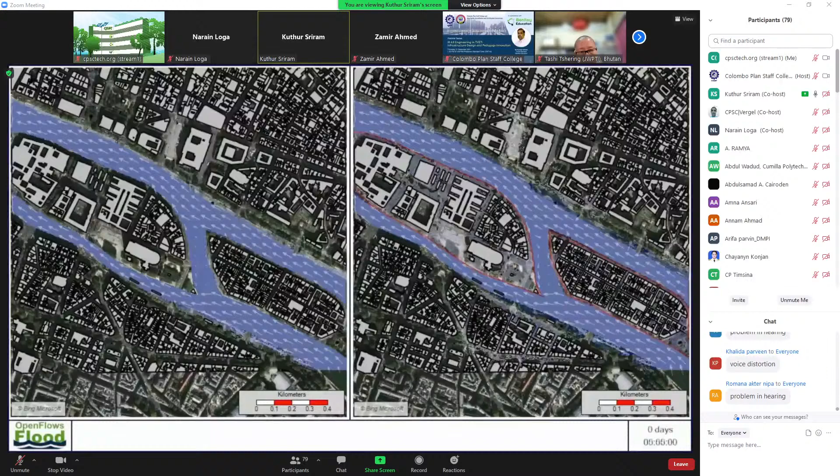This is a digital picture of it. This is a simulated picture, but you will actually see the digital picture of the whole city being flooded. See, those are the areas which are in danger.

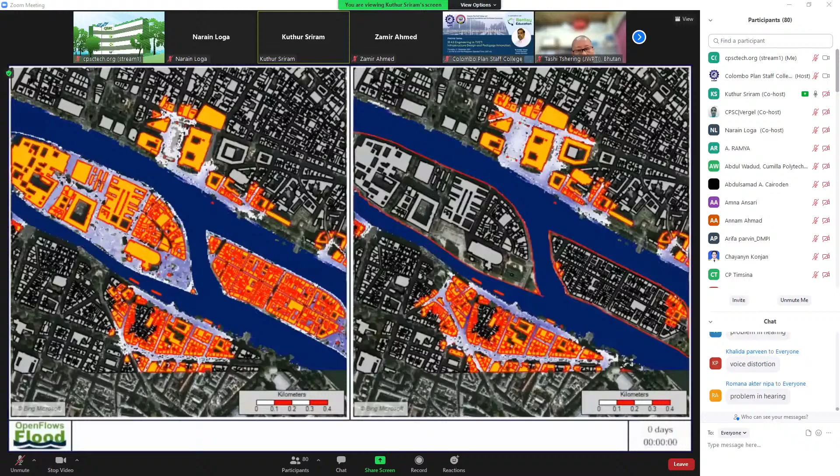Naren, can you hear me? We can hear you, but due to the fact that the video is running and you're talking, it just doesn't go along. You're distorted. Okay, I think I'm almost there.

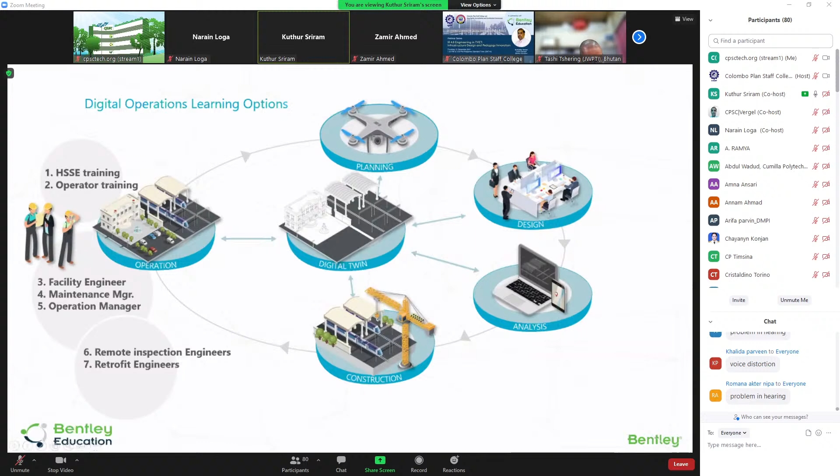So that was the operation stage where you saw multiple places how digitalization can help you. So we talked all about this. Now let me go to the next slide and tell you why we are talking so much about creating a learning pedagogy on this.

Because Bentley is the only company which has got a digital solution for imagine a city. In a city you will have buildings, we have a digital solution for buildings. In a city you'll have roads, we have a digital solution for roads. You need water and utilities, and electrical utilities, we have a solution for that. You have a communication network, we have a solution for that. Then you have rail and transit that goes across, we have a solution for that.

One of the reasons why we are proactively reaching out to the market is to say that anything to do with infrastructure full life cycle, Bentley would be able to create that skill, provide a solution, and Bentley Education would be able to create a skill onto this. That's the reason why we are talking to you about creating learning onto that.

And how can we do that? Bentley Education, I will directly go into a slide which talks about this. Your first step would be jumping into this website, where Bentley Education is the education arm of an $800 million sized public limited company, Bentley Systems.

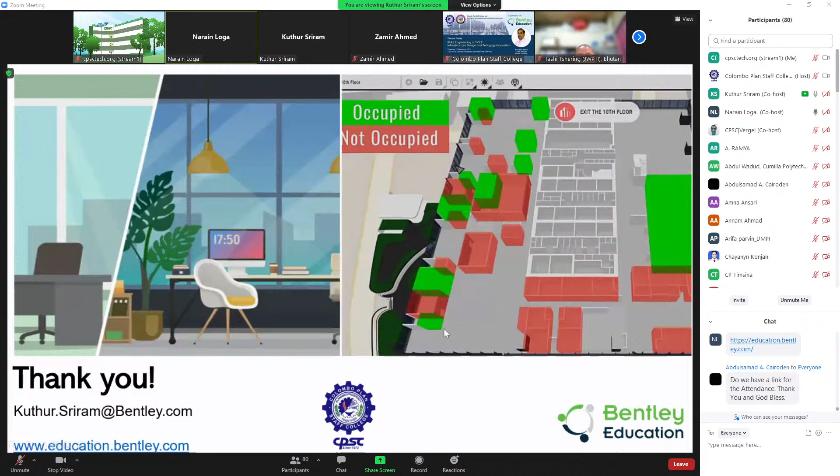Based on the chat box, we had one question. Mr. Kamal Abdul Amir has asked: how can digitalization be implemented in the construction sector in developing Asian countries?

Can't hear you, Sri. Can you hear me? No. Can you hear me now? Yeah, now I can.

Thank you for that question, a good one. I always say, don't try to eat the whole elephant in one meal. You need to eat it in pieces so you don't choke to death. This is specifically relevant for developing countries. So you could possibly start with the planning part of it, a simple surveying part of the planning as digitalization, and start there. Over a period of time, even developed countries do that.

I work with possibly the top 100 ranked universities across Asia Pacific, and even there, they don't take the whole education all at once, what I showed you, what is available. They don't jump into one part because students will get overwhelmed. So in a developing world, my thought would be to take one part of the life cycle which is relevant to you - it could be planning, design, construction, or operation - and take one function in.

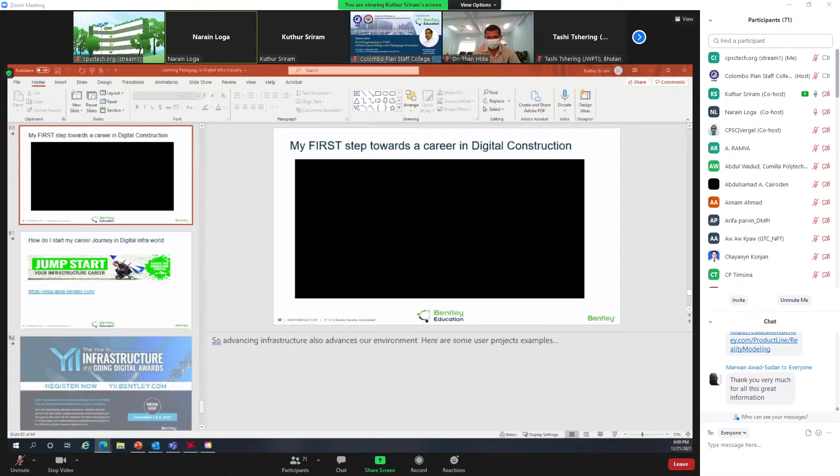End of the day, Sri, also to add to that, a very important key point here is Bentley education is not about profits. We do not look at things on a monetary value. It's all about how we can add value, complementary. Everything that we do, even whatever you see on our portal, is all complementary. There's no money involved. It's all about learning and building those future infrastructure professionals.

What we're trying to achieve here is trying to get TVET to join in the wagon while it's still on the move right now.